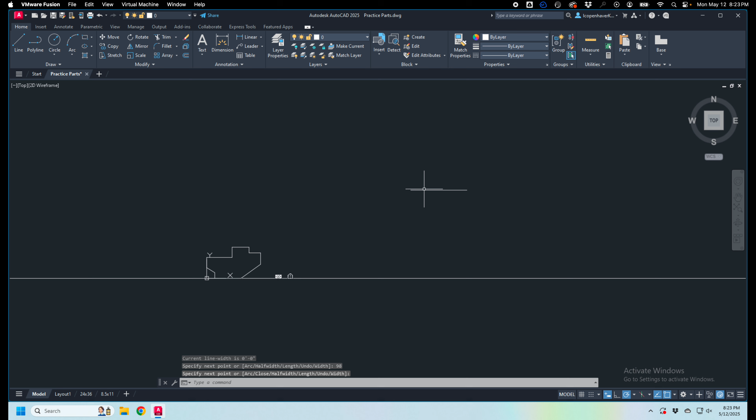I'll bet this section here can be mirrored until we get to here. So that's what I'm going to start with. So this is 25 up. Well, let me just start with that first one. So we'll go 98 units. Whoa, it's so giant. That's okay. I'm gonna move it up a little bit further away from everything else. So 98.

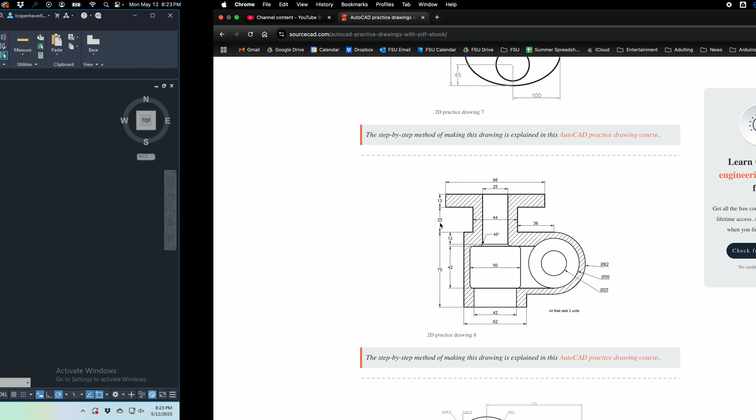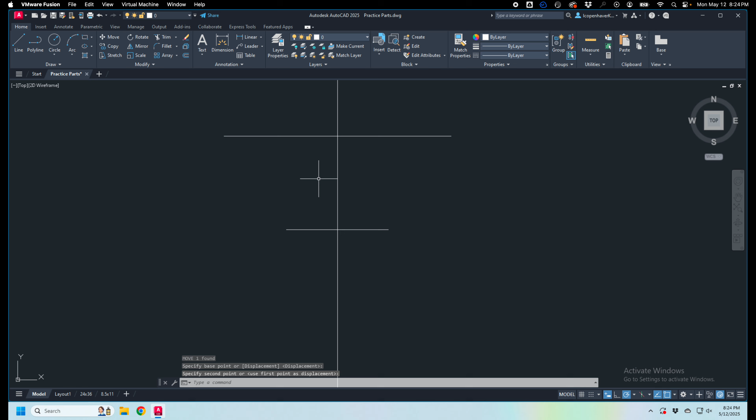Go 13 down on both sides. We're 44 across here, so I think I'm gonna use a guide to get that dimension. So 13, and then some distance in, and then 25 down. So 44. I'm going to give myself a vertical line. I'm going to use an X line, XL, spacebar, V for vertical, and then place that at the center line. That's also going to give me a place to put this 44. And we'll move that into its vertical position after we have those other 2 dimensions.

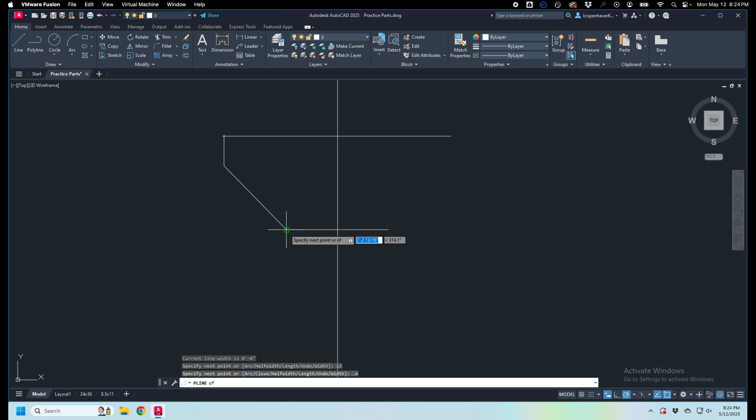It's 13 down and then 25 down. So polyline 13. And then we go to some point here, right there, and then 25. Now I can move this into place right there. And this, I should be able to just mirror it around this center line. Now I have both sides.

Here I can see that this is 62. Again, there should be some better dimensioning here, but we're just going to go with it. We're going to assume that all of this is centered around this axis. So 62 is the outside, and then 42 is the inside here. 62. I'm just going to draw it out of place and then put it on this line somewhere.

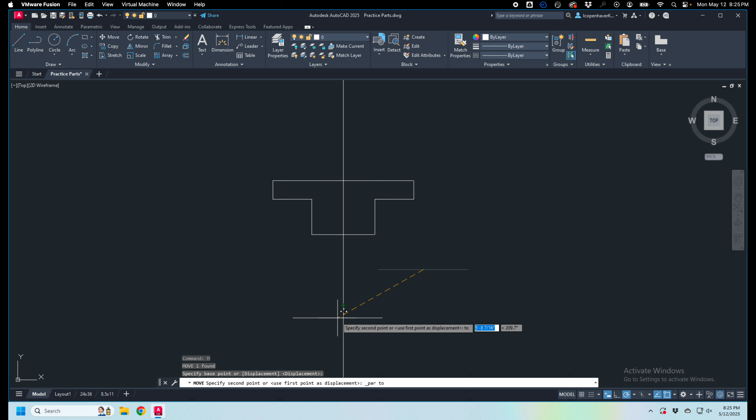Oops, I don't have the O-snap turned on to be able to snap to that. So if I shift right click, that's going to bring up my O-snap filtering. Is parallel the one I want? Yeah, it is. Look at that. I don't know, sometimes it doesn't want to work. Let's try perpendicular. Nope, parallel was the one. Great.

Okay, this center thing is 25. It goes down, and then there's a 45-degree chamfer at the end. So I've got 13 plus 12 is 25, plus 25 is 50, which means that it's 50 to this point, and then there's a 45-degree chamfer. And then from the bottom of that chamfer, that's not very easy to figure out. Well, I'll come back to that. Let's start working on this side here.

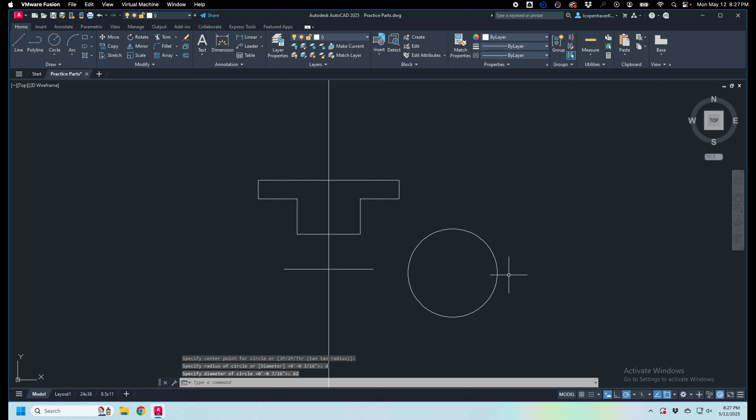So I've got 36 from the corner here that I just created out to the edge, and then a 62 diameter circle with a 50, and then a 25. All those are diameters. So 62, 50, and 25. Let's go ahead and create those. And I've forgotten them already. 62, 50, 25. So I'm going to start my circle command, diameter 62, spacebar to repeat the command, diameter 50, spacebar to repeat the command, diameter 25.

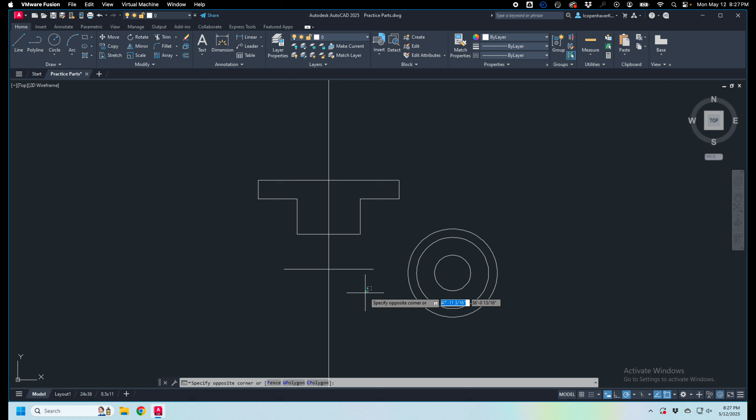And then 36 out from the bottom of that 25. So from right here, 36. I'm going to need a polyline that goes 36. And then all of these I can move in at once. I might be tempted to go ahead and start to trim this, but not quite yet. I need to have this line in there as well, and I don't have a dimension for that line at the moment. I do know that the distance from this to this is 12.

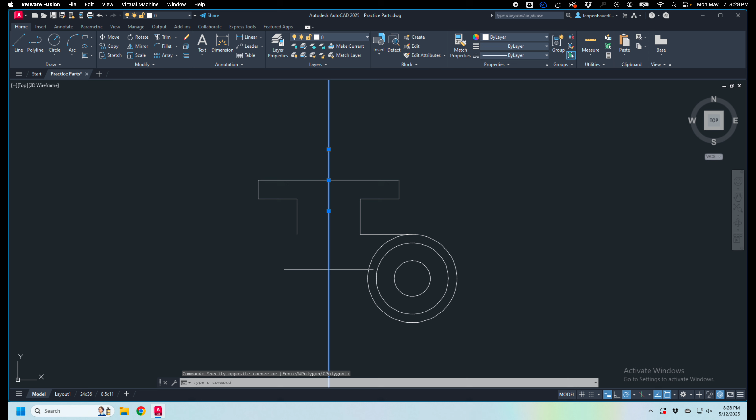And I do know that this goes out to 62. Was this my 62? Yeah, this is the 62. So I'm going to move this down to there.

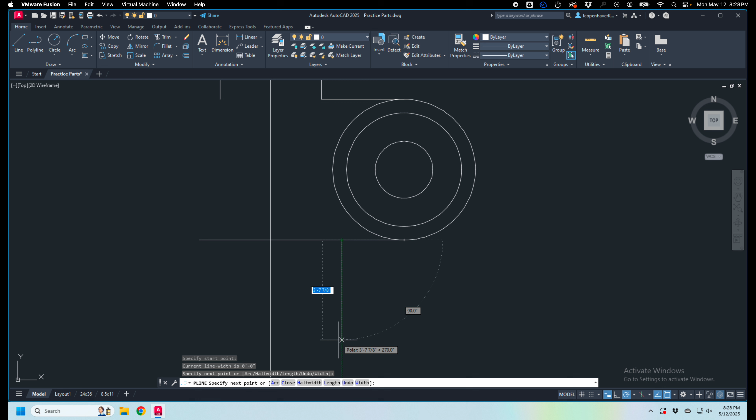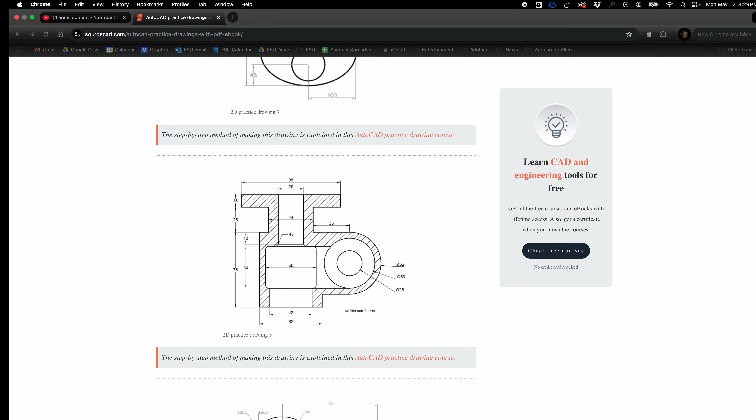I'm going to use a polyline to create that. Don't know what that length is supposed to be, but that's okay. Now I'm going to drop in a vertical so that I can then trim this half of the circle and make that go away. Oh, that's not what I even needed to do. Undo all of that because that's just a bunch of hogwash. Okay, I will need to trim it here though.

But I'll need to figure this out first. So let's see, that's... you know, they really didn't dimension this all that well. It's kind of annoying. I do need this horizontal line across here from that second circle, so let's go ahead and do that.

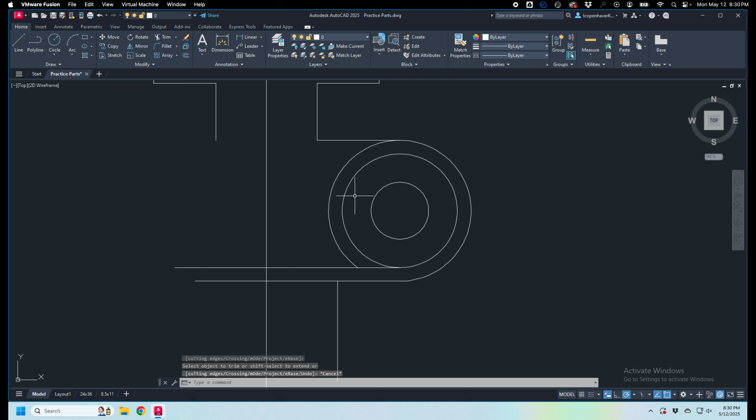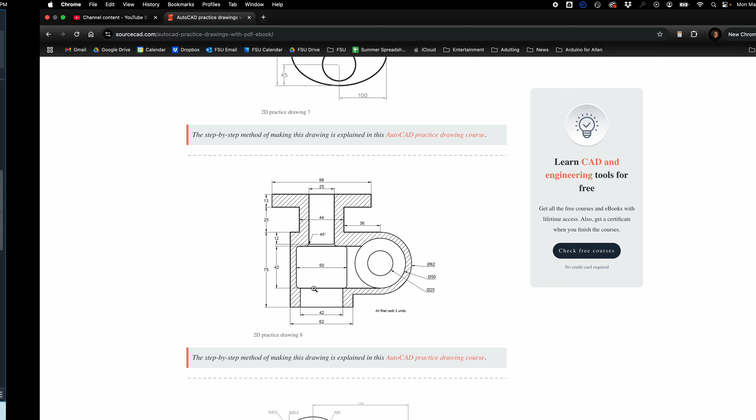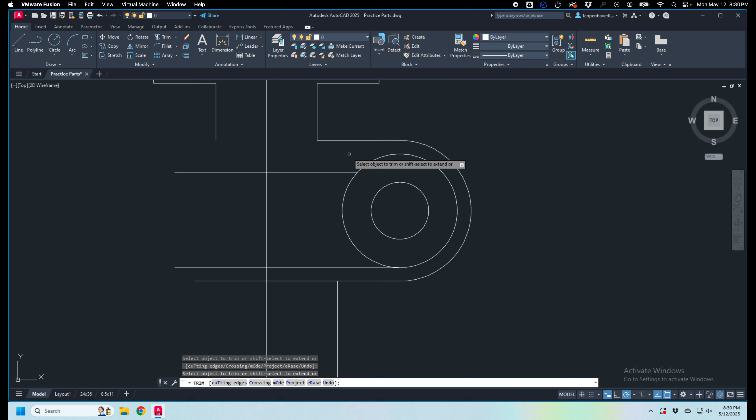Okay, this line here is 42 up from this line here. So I'm just going to duplicate this line. So that's copy and then type 42, and that should put it 42 up from where it was. Now I can trim this and get rid of all of those. Okay, that looks about right.

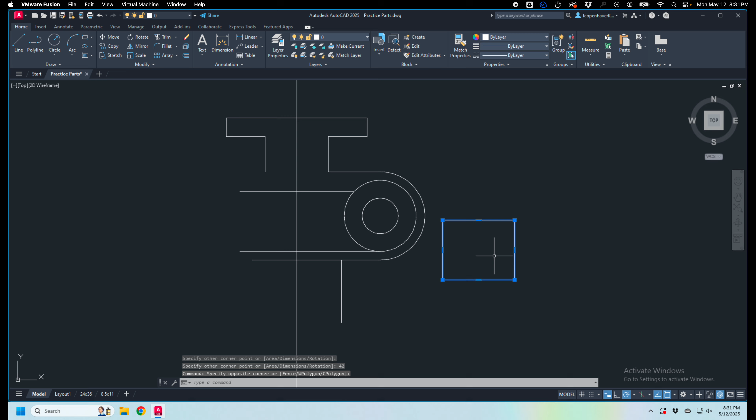Okay, let's go ahead and do this. This is 50, so that's a rectangle that's 42 tall by 50 wide. REC for rectangle. 50 wide, 42 tall. And it is centered here, I think. Let me take a look at that. Yep. Okay. I'm going to isolate this so I can chamfer it really quick. So to do that, I'm going to say ISO, for isolate objects.

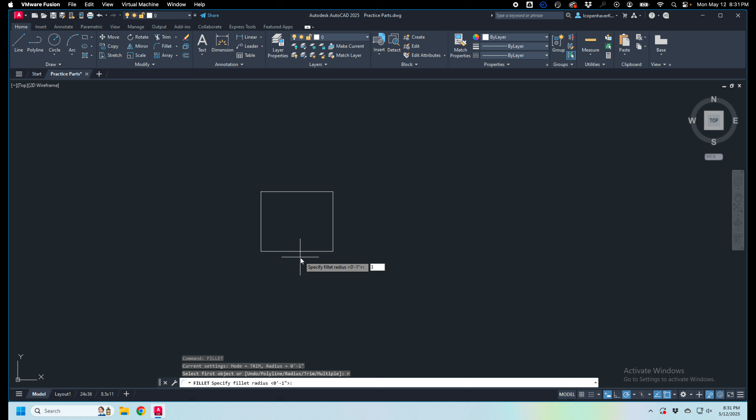And I said chamfer, I totally meant fillet. And I'm going to set the radius at 3 because it told me to in the drawing. And I'm also going to select M for multiple. And I'm going to click around here. Boom. All the fillets are done. And then I'm going to type unisolate. And there we go.

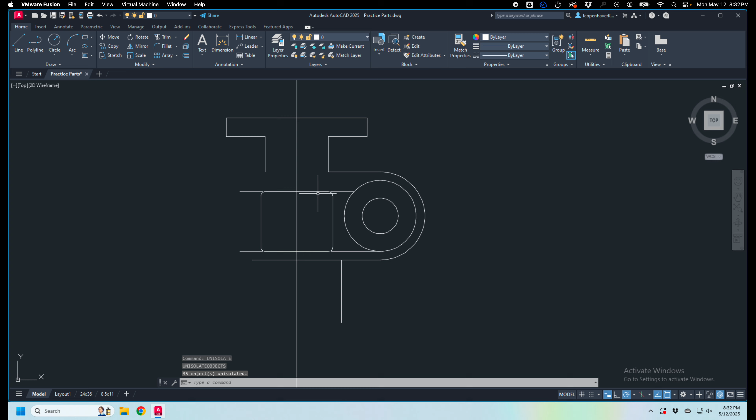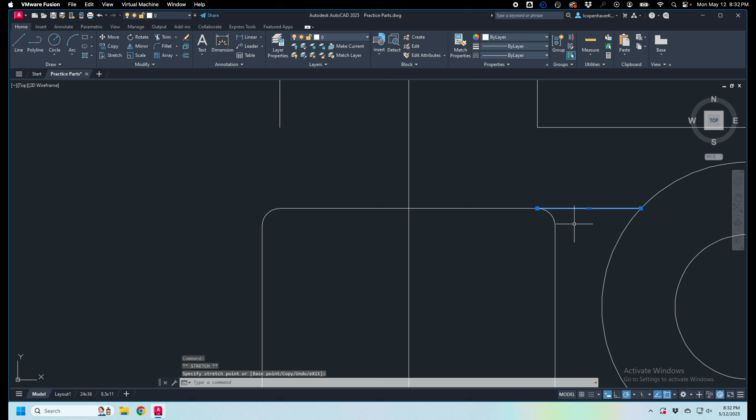Okay. Do I still need this line? Let's see. I do on this side. I don't on this side. So let's go ahead and get rid of it. I'm just going to hit that. And actually, I really want to trim it from here. Or I can just do that. Lovely. Yeah.

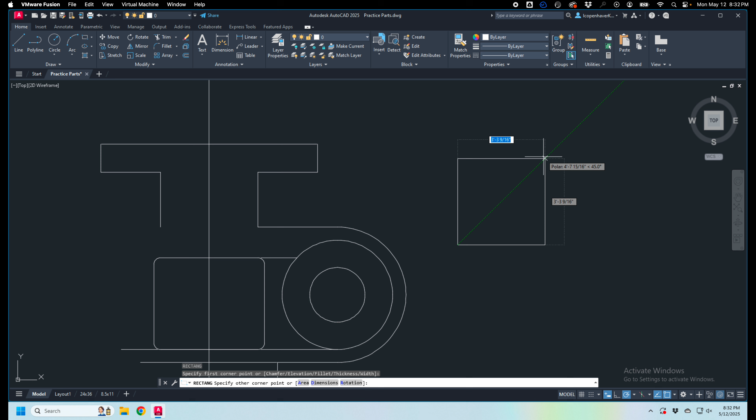Okay, we do have this fillet. This opening is 25 wide. Do I have that line in there? Not yet. And I don't really have a height for that yet either. So maybe what I'll do to create that is give myself a rectangle that is 25 wide, and I'm just going to pick 45 tall for now, and then I can just adjust that in a second. Great. So I'm just going to stretch this like that,

and then I'm going to trim this away. So I have these two things, and then I'm going to fillet. Nope. I'm going to chamfer. And let me see what 3 looks like. I don't think 3 is correct. I'm going to do chamfer. I'm going to type D to put in the distance, and I'm going to say 1 and 1, because that's my best guess as to what that's actually supposed to be. Great. That looks lovely. And you'll notice that this actually went ahead and joined those two things together, which is interesting.

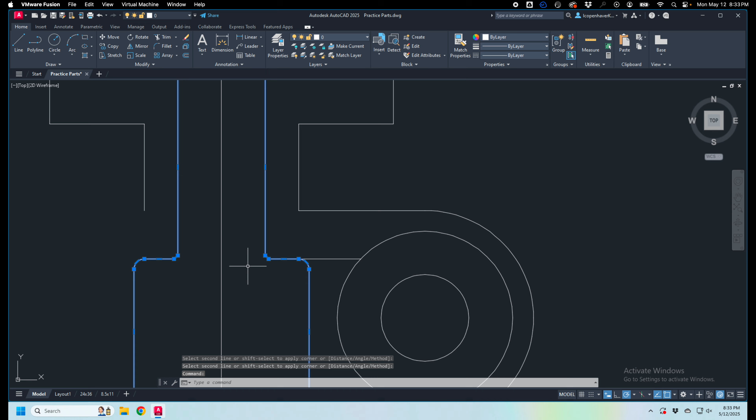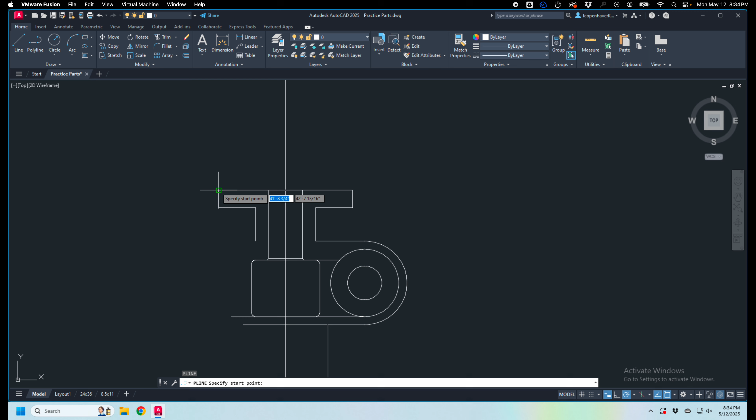Okay. There is a line here that I need to draw in. Oh, I think I probably just deleted those, and I really shouldn't have. That's okay. Okay, there's those two lines. There's a line across the bottom, and then there's this here that's 42 wide and then some distance tall. I don't have a total height yet, so it's 75 plus 25 plus 13. That's 113. I'm just gonna give myself a guide. 113. And I put the leg of that out to the other side to remind myself that it needs to go away later.

All right, I'm gonna make a rectangle that is 42 wide, that is, I don't know, 20 tall, and I will put that here. And I'm gonna use point filtering to put it at the right height without having to rely on this thing. You absolutely can, but this is just another way to do it. I use point filtering almost exclusively in 3 dimensions because the extension lines on the O-snaps just don't work as well. So when you're using point filtering, basically you're telling the computer that you're going to give it the value of either the X coordinate or the Y coordinate or the Z coordinate.

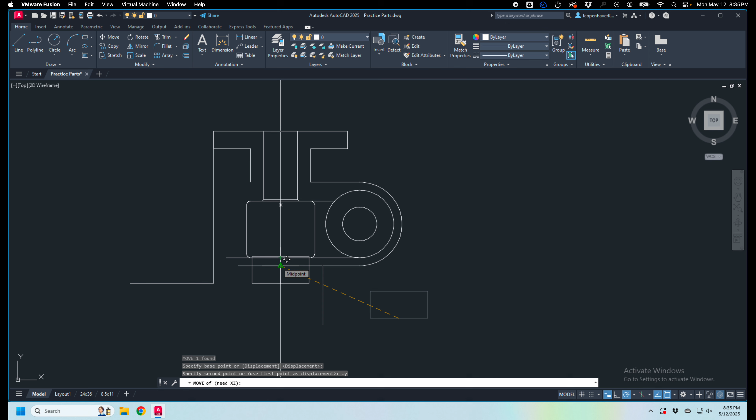And you do that by putting dot and then whichever axis you want to establish. So in this case, I want to establish that the vertical position is lined up here. So I'm going to type dot Y spacebar, and then I will click here on that O-snap, and then I can establish the other things based on some other O-snap. And you'll notice that as I drag this across, because I've already given it the Y coordinate, I just have to give it the location left to right, or the X coordinate. So I do that, that lines up.

I'm gonna move, well, not move, but stretch this like that. And then let's start doing some trimming to get this cleaned up. Okay, I think I can get rid of that. This goes away. Let me get rid of this tail here.

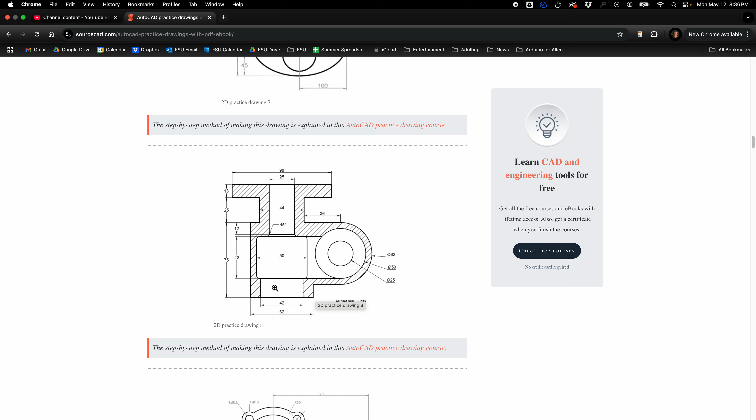I'm gonna leave that tail there actually. This one, I'm gonna make shorter and have it end right there. I do know that I need one that's 62 to go all the way across. Like that. This can get trimmed.

This needs to go... Actually, I'm not sure where that goes. Oh, that goes straight up all the way to this little jog backwards. So here, I'm going to use point filtering again to give myself a vertical like that.

Okay, so something to pay attention to. We're going to use a new command that's called hatch. And for the hatch, basically the way it works is that you create a closed shape. You start your hatch command, you click inside it, and then it just puts all the hatches in. But in order for that to work, it needs to be a closed shape. So the way that I've done this might actually not yield great results. We'll have to see. If I'm being honest, I don't hatch very often because I use view base.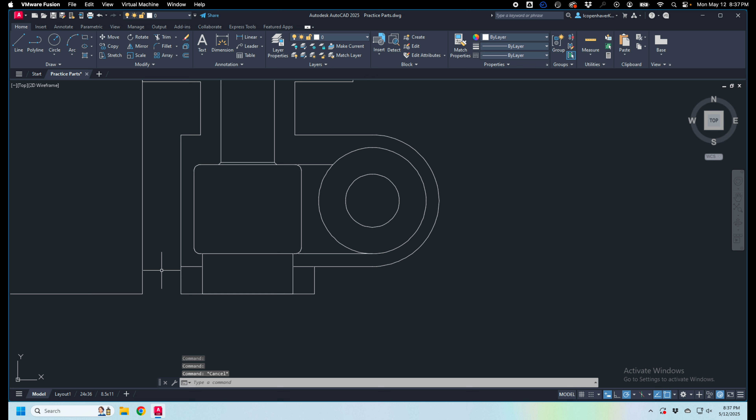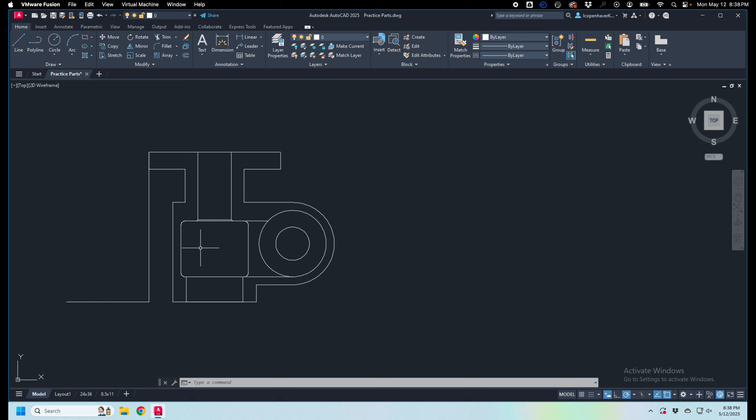This thing can go away. This can go away. Honestly, I think that's it. Does that look right? That gets hatched. Yeah, I think that's it. I can get rid of that. Okay, so let's see how this hatch works. So I just type hatch to start the command. You can also find it here. So this is how you basically do a fill.

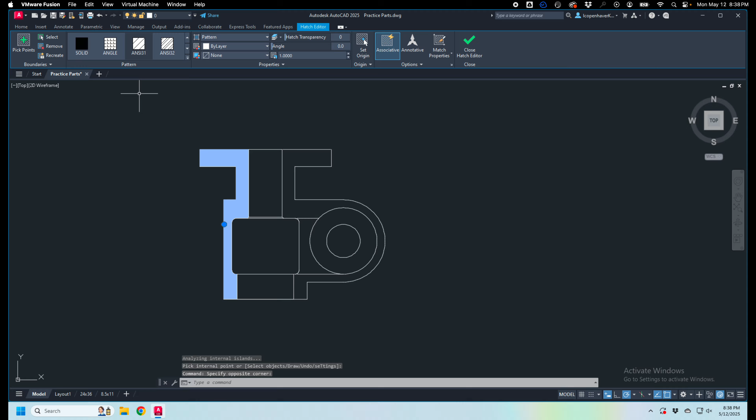So you start your hatch command, and then it says pick an internal point, and it will gray out or otherwise highlight the area that will be hatched, and then click. Now it stays that color until you hit spacebar and then accept it. So I'm gonna hit spacebar to accept. Oh no, that's not what I want it to look like. I'll bet you if I zoom in, yeah.

Okay, so the reason it's doing that is because we're in model space, and hatch is really something that kind of wants to be done in paper space. So the spacing here is so out of whack because this was in inches and it really wants to be in millimeters. So we can change that here by changing the scale for this particular hatch. So if I change this to like 25, it'll look more like the drawing.

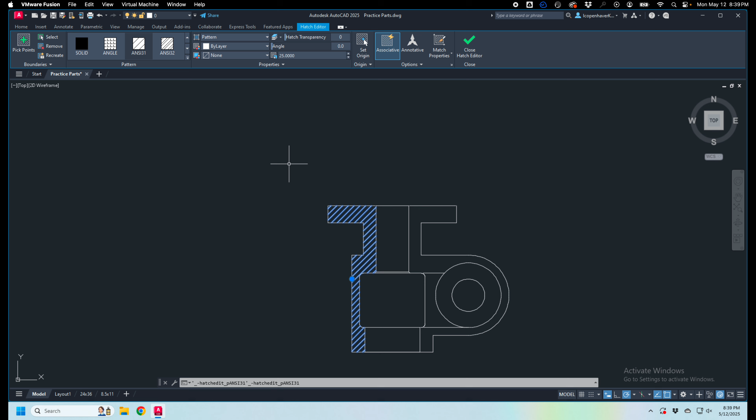Okay, let's see why this didn't hatch when we asked it to. Let's start that command again. Oh look, it worked that time. Hit spacebar to accept it. Oh, I need to change this again. 25. Great. You also have some other options here. You can change the angle. Let's say that I want one to go one way and the other to go the other way. I can rotate that 90 degrees.

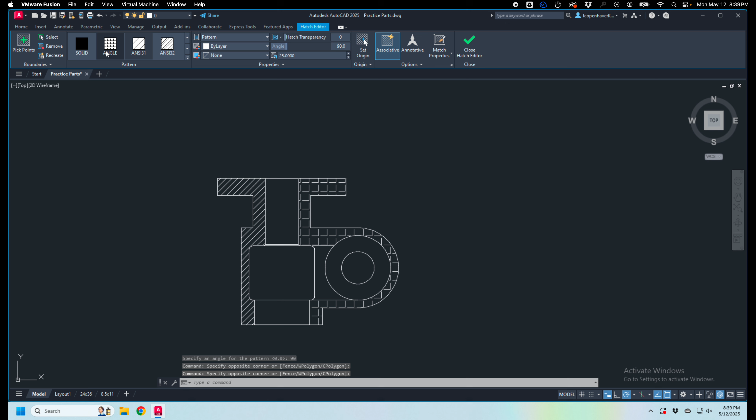You can change the transparency here, like if you want it to be less bold, that's a way to do it. You can change the patterns to a bunch of different standards. You can give it solids. It's very, very changeable. And what those symbols mean exactly is kind of up to you.

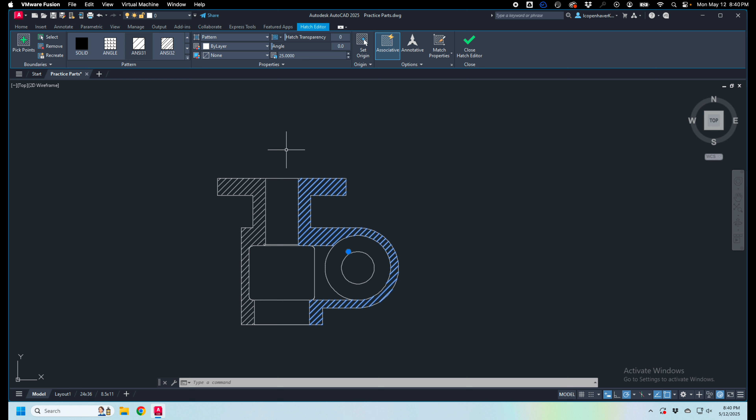If you're working in industry, like let's say you're working for, I don't know, a theater consulting company. I'm going to change that hatch back to 0. So if you're working for a theater consulting company that works with the construction industry, you absolutely should pay attention to what symbols they want you to use. For us, we don't have a specification. So most of the time, a 45-degree angle hatch is fine. But it's up to you. As long as your work is clear, whatever you choose is fine.

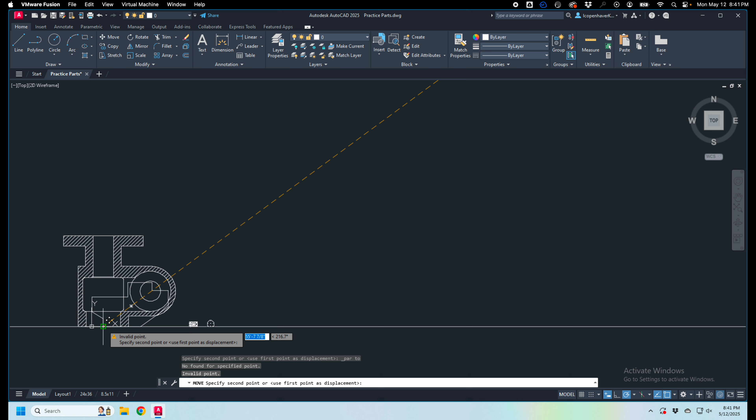Okay, I'm gonna move this down to that line that has all the other stuff on it. Oh, it's so big. Oh, I need to use that parallel O-snap again. Boom. I don't know why it keeps giving me invalid point. Whatever. There we go.

All right, so that was one of the practice parts. We introduced hatch. We tried to take apart something that was a little bit more complicated. Honestly, that was kind of fun.